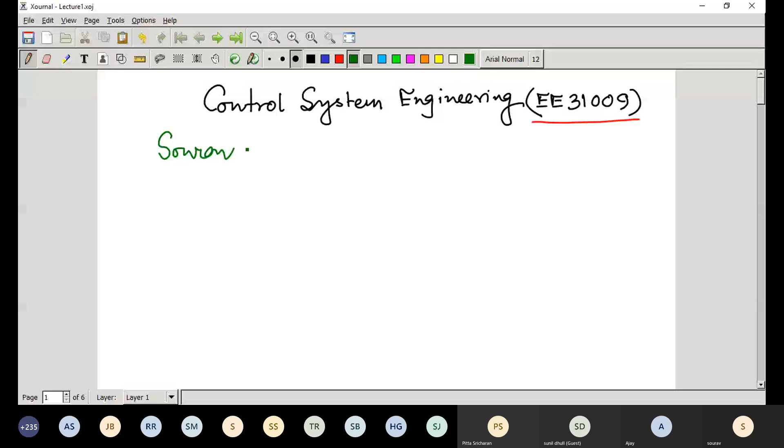So the name of the subject is Control Systems Engineering, and two teachers will be taking this class - myself, Sowrov Patra. Please mute your microphone.

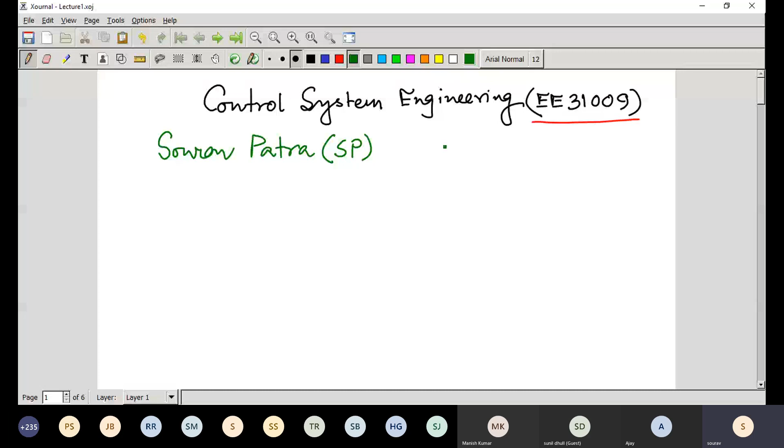And another professor, Professor Arun Ghosh. So both of us will be taking this class, and I will be covering mostly the analysis, and Professor Ghosh will be covering the design part.

A detailed syllabus has already been uploaded. You can see it, and also the breakup is given of which topics will be covered by me and which topics will be covered by Professor Ghosh.

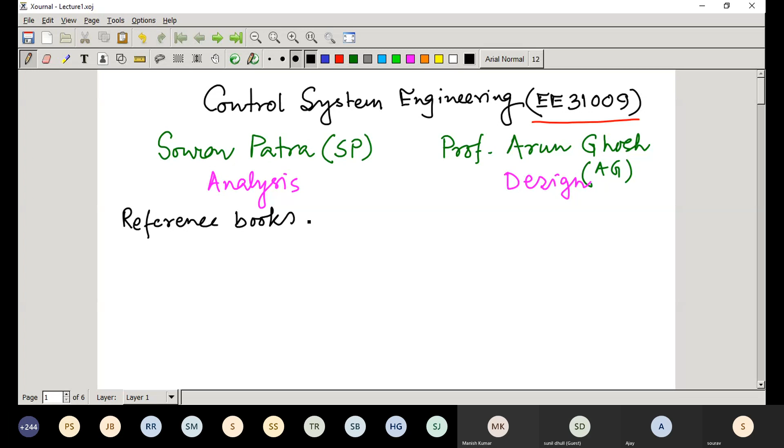There are some reference books that I will be following - four reference books, and I think Professor Ghosh will be giving some other reference books. One is K. Ogata, a very standard reference book, that is Modern Control Engineering.

This is Prentice Hall of India, PHI. Then R.C. Dorf and R.H. Bishop, that is Modern Control Systems, published by Pearson.

Then the third book that we'll be following, that is B.C. Kuo, Automatic Control Systems.

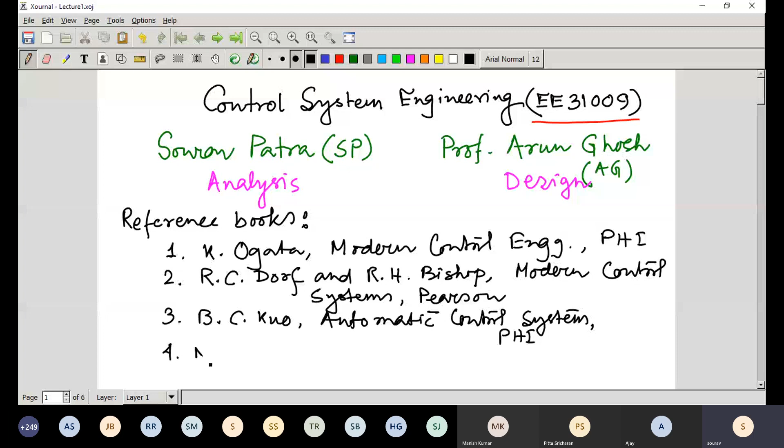This is PHI. The fourth one is Norman Nise, Control Systems Engineering.

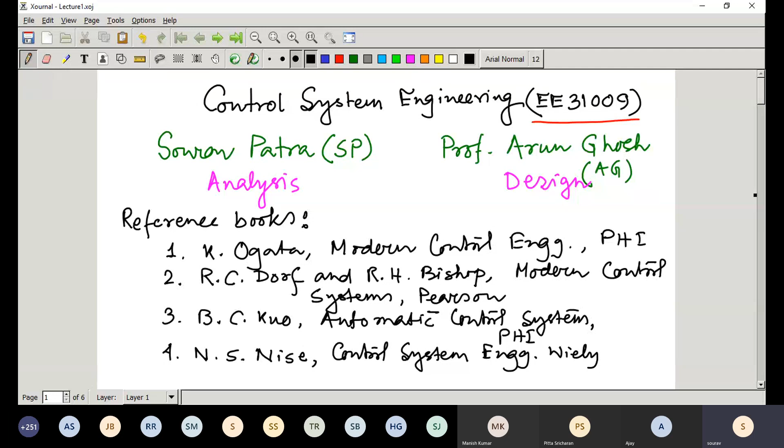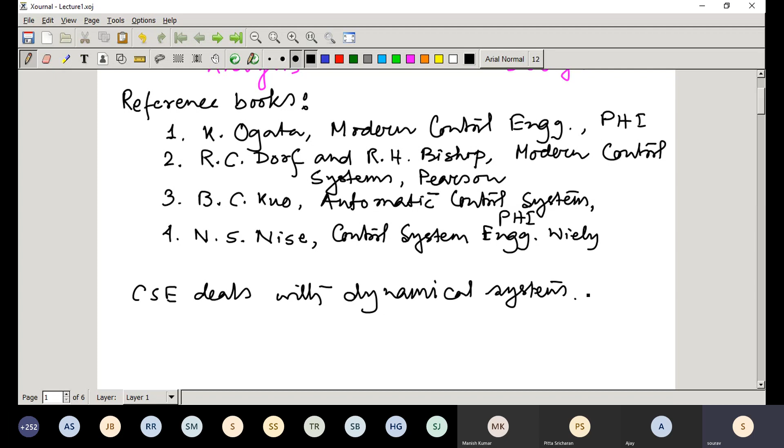So control systems engineering actually deals with dynamical systems. So now let us see what is dynamical systems. As the prerequisite for this course is signals and systems, I am not going into detail of systems here, what is the definition of systems and the different types of systems. I am just going to give you some ideas and definitions of various types of systems that we'll be dealing with in this course.

So first of all, what is a dynamical system? A system is said to be dynamical, or a dynamical system, if its behavior changes over time, often in response to external stimulation, which is that external input, external stimulation or forcing function.

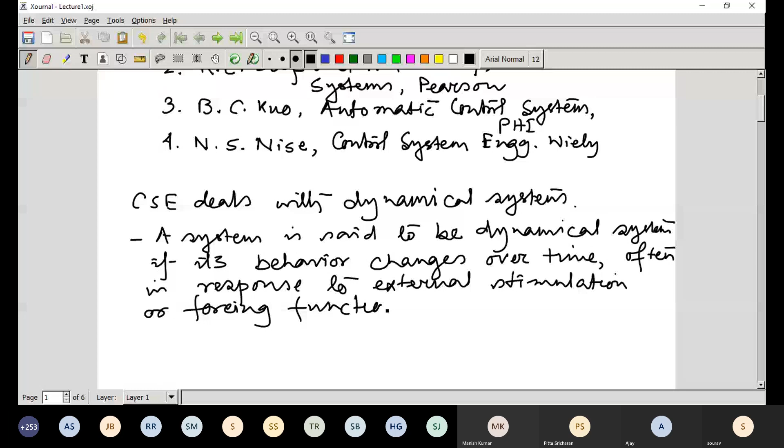In signals and systems, already you have learned different types of stimulation or forcing function, standard forcing functions like step input, ramp input, parabolic input, sinusoidal input. So different types of inputs, if you apply to that system, the dynamical system's behavior changes over time.

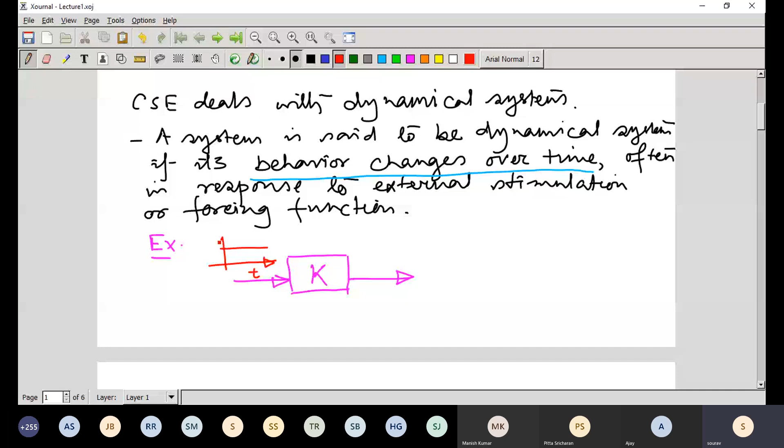So for example, suppose you have a system with just a simple gain K. Now if you apply some input to that system, suppose that input is a step input. This is time T, and the input you have applied is u(t). So then what happens? The output that you will be having is just multiplied, if it is a unit step, so the output y(t) equals K. So from here you can see that this system is not a dynamical system, because whenever time changes, the output remains constant. So this particular system is called a static system.

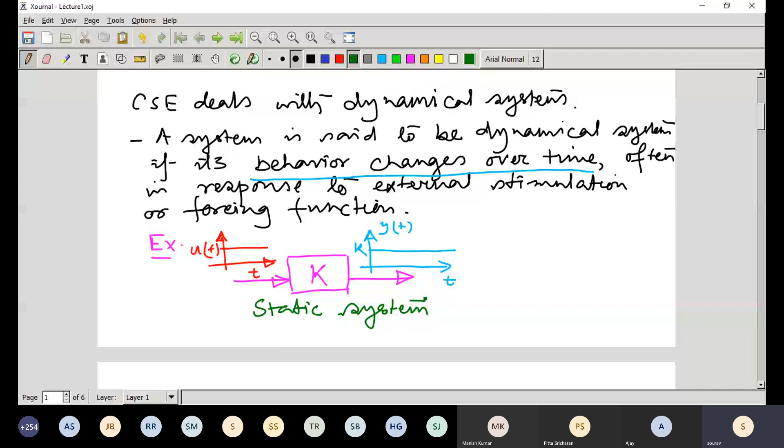So this is called a static system. So then what would be a dynamical system? For a dynamical system, if you apply an input here, suppose you give a unit step, this is T, this is u(t), and you observe what is the output. So suppose if it is a second order type of system, then its response looks like this. That means whenever time grows, you can see that the response is varying. So this is actually the dynamic system.

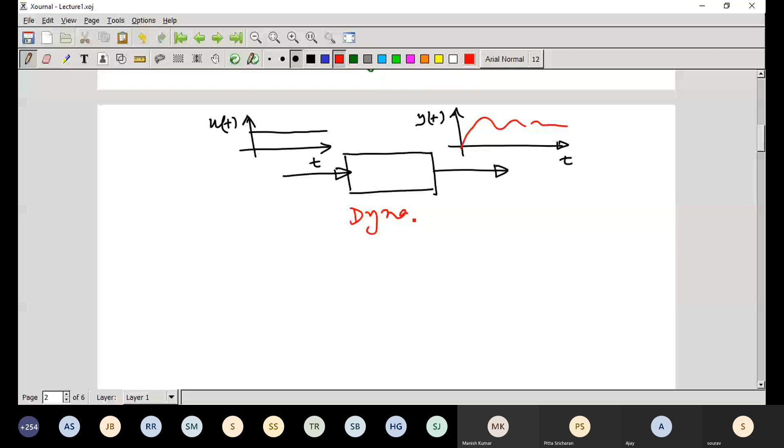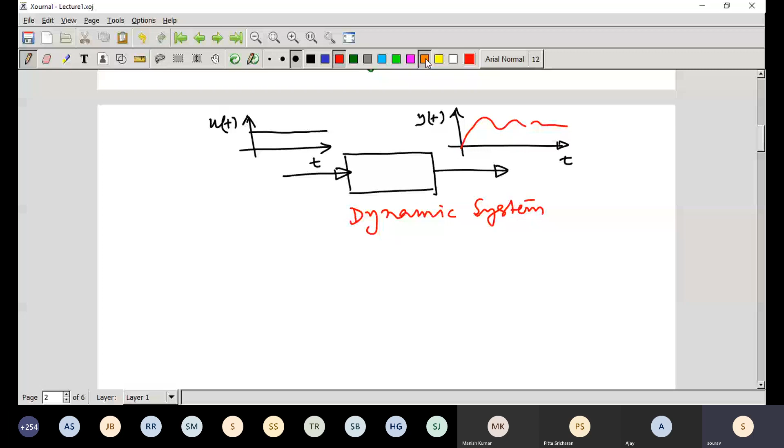So there are two types of systems, static and dynamic, and in this course we will be dealing with dynamic systems. And you can also see that in our surroundings there are two categories of systems, two types of systems that we can see in our surroundings.

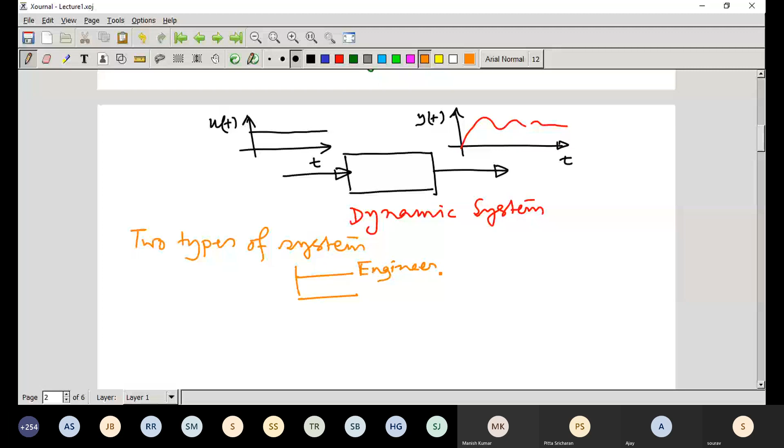What are those? One type of system is called engineered systems. So what are engineered systems? That means that we make. Engineered systems are basically what we design, that we make.

And the other type of system is natural systems. So natural systems means biological systems, climate, etc.

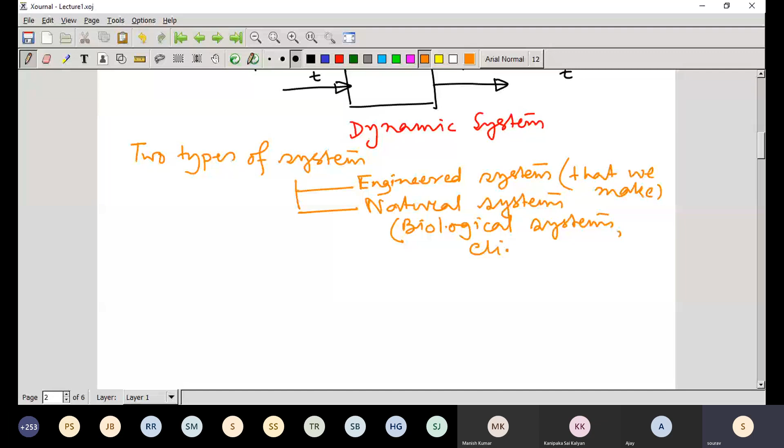So in this course, we will be just dealing with these engineered systems, and in the modeling part, again we'll be considering some engineered systems, and we'll see how to get the input-output behavior, or how to write the mathematical equations to describe the dynamics of these systems. So basically what I want to say is, in this course, we will be concentrating on engineered systems, that means systems that we can make. As for how to make, how to design, that part will be covered by Professor Ghosh.

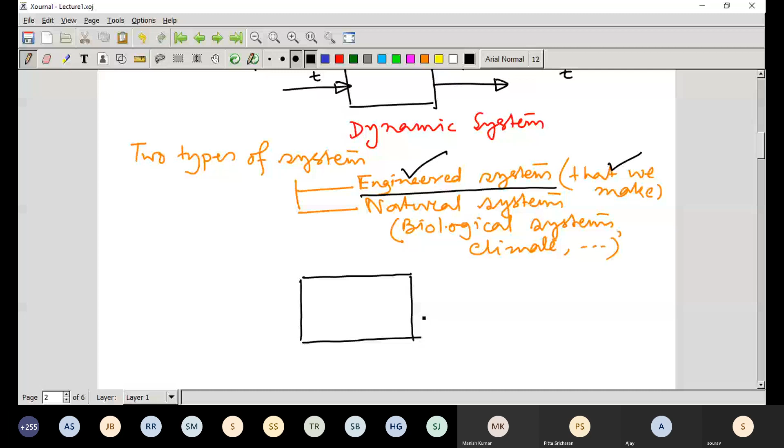So let us see how we can represent a dynamical system. A dynamical system is represented by a block. This is the dynamic system, which in control is also called the plant.

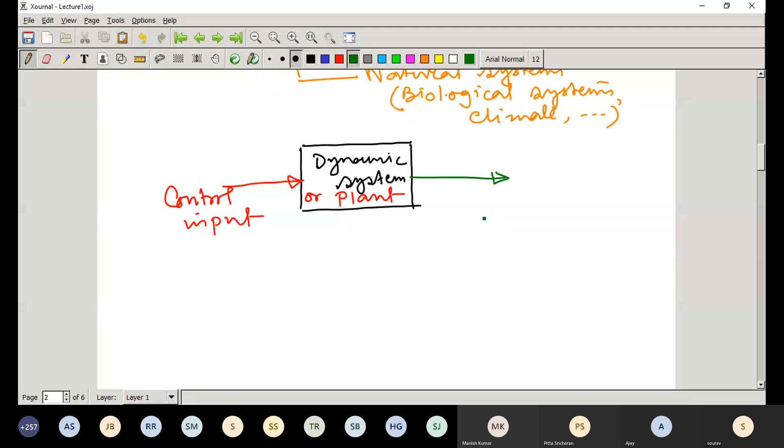Now it has an input, which is called the control input. Now it has an output, which is called the output to be controlled. So in control systems, whenever we'll be dealing with dynamical systems, your objective is to control the outputs. How? By designing a suitable control input.

And in a dynamical system, which are actually inevitable, there are disturbances and noises. That means there are some external signals that enter, or some process noise, process disturbance as well. These signals are called disturbances that enter the system, and basically these disturbances create problems for the system, and your job is to design a suitable control input so that the output will follow the desired shape, or satisfy your requirement, in presence of disturbance and noise. That is the objective. And you need some other signals, called measurements.

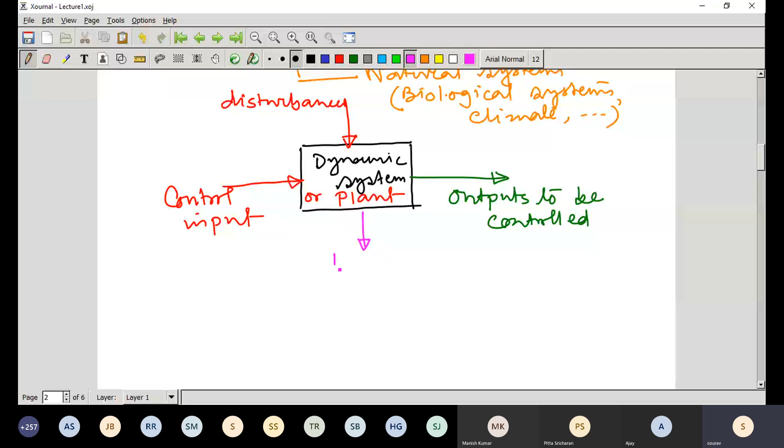Later we will see what we can do using this measurement. In dynamical systems there are four signals: control input, output that needs to be controlled, disturbances entering the system which you do not have control over, and signals measured using sensors. Later we will use these measured signals to close the loop. So for getting closed loop control, we need these signals.

Now let us see what are the different types of systems that we'll see in this particular course, and also we can see in the surroundings the types of dynamical systems. I think you have already learned these things in signals and systems. So we can categorize the dynamical systems from different perspectives.

With respect to the method of analysis and design, we can divide systems into two categories: linear systems and nonlinear systems. I hope you all know how to test whether a system is linear or not. In case of linear systems, it follows the principle of superposition and the homogeneity principle.

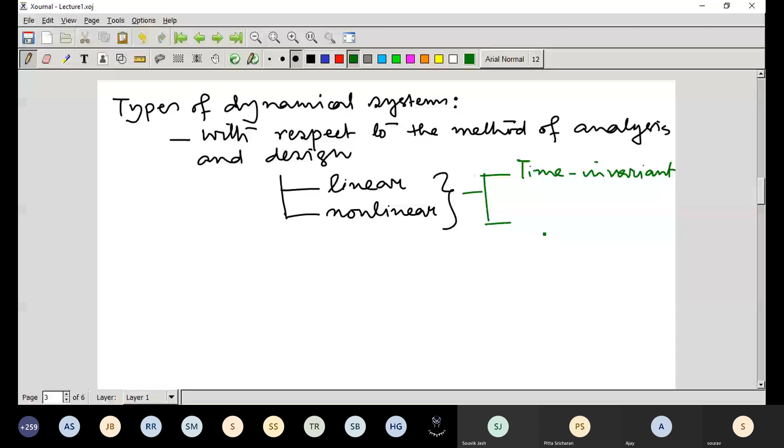And these linear and nonlinear systems can be further categorized into two different classes: time invariant and time varying. So these are the two categories, linear and nonlinear systems, categorized with respect to the method of analysis and design.

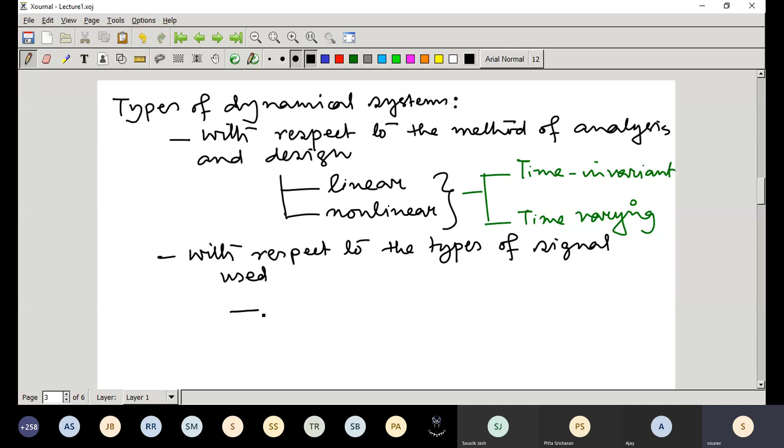Then the other category is with respect to the types of signal used: one is continuous time systems, and another is discrete time systems. So these are the different types of systems in our surroundings, categorized with respect to different aspects: linear and nonlinear with respect to method of analysis and design, and continuous time and discrete time with respect to signal type.

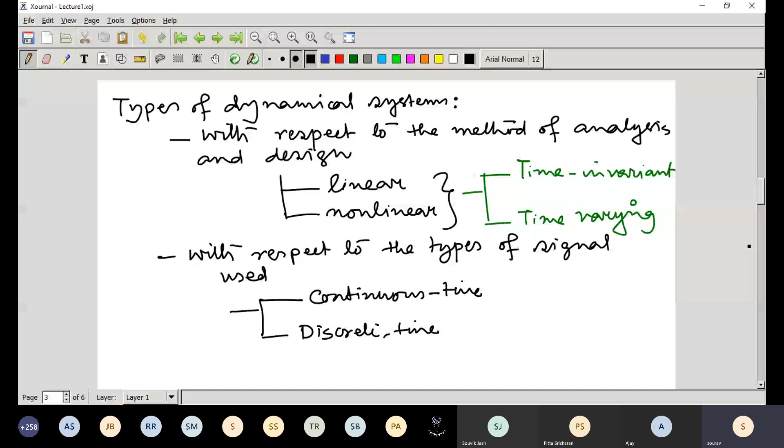I think you all know these things, you have learned it in signals and systems. So let us see a few examples.

Say x dot, this is a dynamical system with some memory: x dot equals a x(t). Now x dot equals a x(t) squared. Now x dot(t) equals sine(t) times x(t). Now x dot(t) equals sine(t) times x squared(t). Here I have taken simple examples for better understanding; you can take other examples, and I think you have already done these things in signals and systems, just for recapitulation as preliminaries.

So the first system is the linear time invariant system. Those who forget these definitions, I suggest you see your Signals book. Here you can see, because of the square term, this is a nonlinear time invariant system.

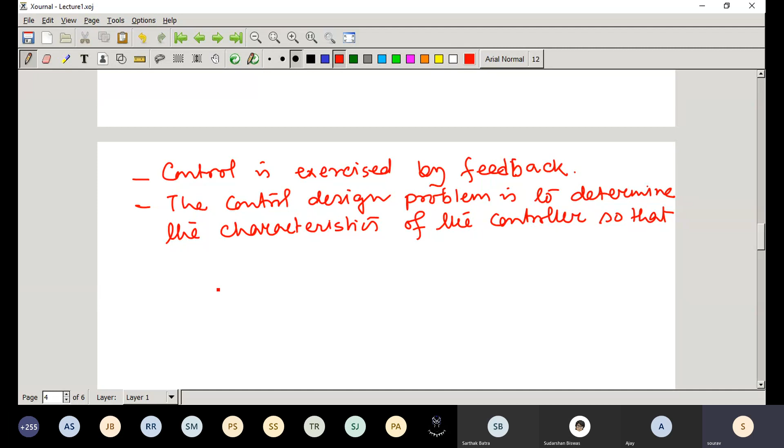So these are actually some objectives. Let me point out those things. That is the control design problem: to determine the characteristics of the controller so that the controlled outputs, we have already seen that controlled outputs...

can be... so there are various objectives. One objective is it can be set to prescribed values called references.

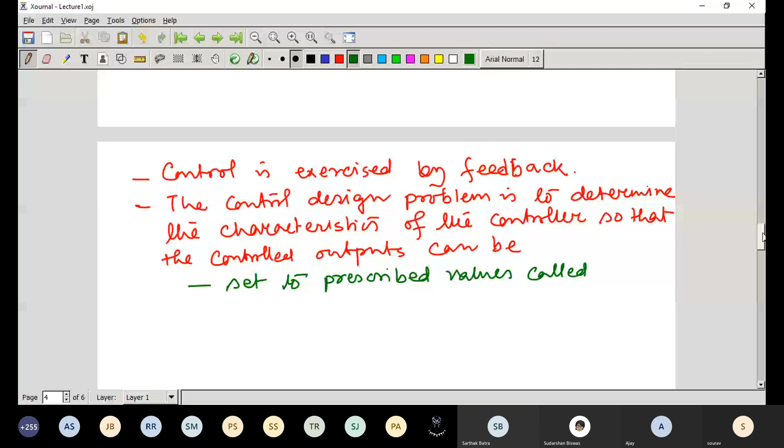The second objective is maintain at the reference values, because these reference values are set by you, the designer or the user, and your job is to design a controller so that the output will be maintained at the reference value despite the unknown disturbances.

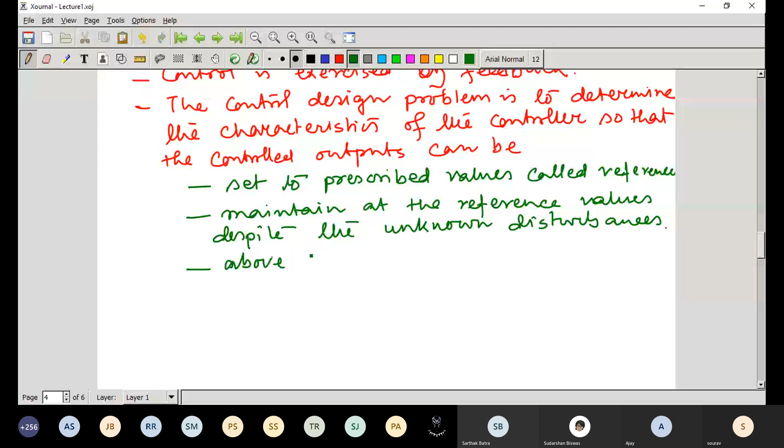And the third one is above two. That means these two above are met despite the inherent uncertainties and changes in the plant dynamics.

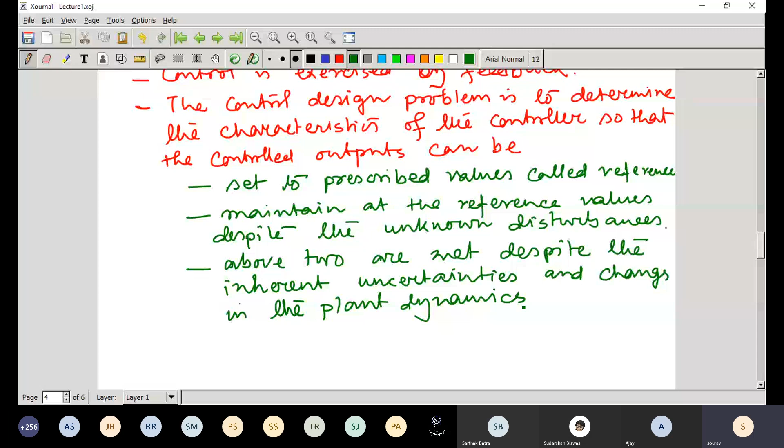So try to understand these three objectives. This is actually the main objective of control systems. So control is exercised by feedback. That thing we'll be discussing in detail later. Now, the control design problem is to determine. So these three are actually the different objectives.

One is you set the reference value. Suppose I want that output will be at the value 5. So as a user, you will be setting that value 5, and the control system is to be designed such that the output will track that reference value at 5. Now the point is, in physical systems, there are a lot of changes, a lot of unexpected things may happen. One thing is the disturbance and noise may enter, which are actually inevitable. So you need to design a controller so that even if there are some disturbances, the output should be at the value 5.

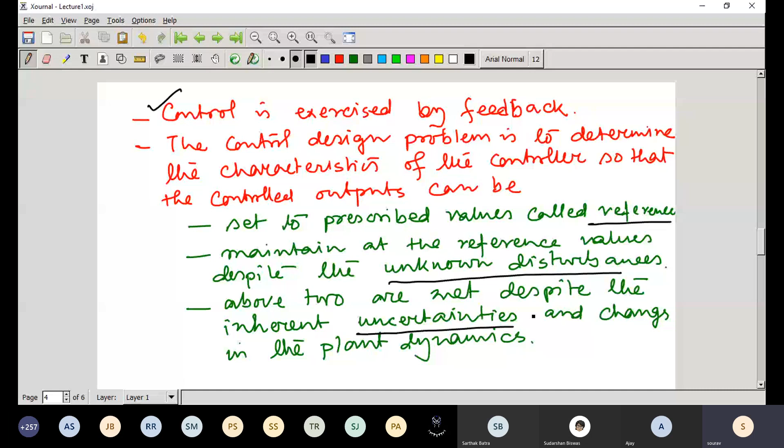5 means you have set that value at 5. Whatever value you will be setting, that is called the reference value. And another important aspect is the uncertainties. Uncertainties means whenever you have designed a controller, you have considered all the nominal situations. You have assumed that all the parameters are known and there are no changes, no environmental changes, nothing is going to happen. But practically it is not like this. Practically everything is changing continuously, and the value that you have considered to design a controller may not be the exact one. Even if you get an exact value, once that system runs, that value may change because of environmental conditions, aging, etc. So a lot of uncertainties will be introduced in that system.

So as a control systems engineer, you need to design a controller so that the output should be maintained at the reference value even if there is some disturbance or uncertainty. So basically this concept is called robustness. This is called the robustness property. That means if the designed system can ensure the output response in presence of disturbance and uncertainty, then robustness is ensured. So in this particular course, at the end, we'll be taking some lectures on robustness. This is very interesting as well as important from a physical point of view, as you know, uncertainties and disturbances are everywhere.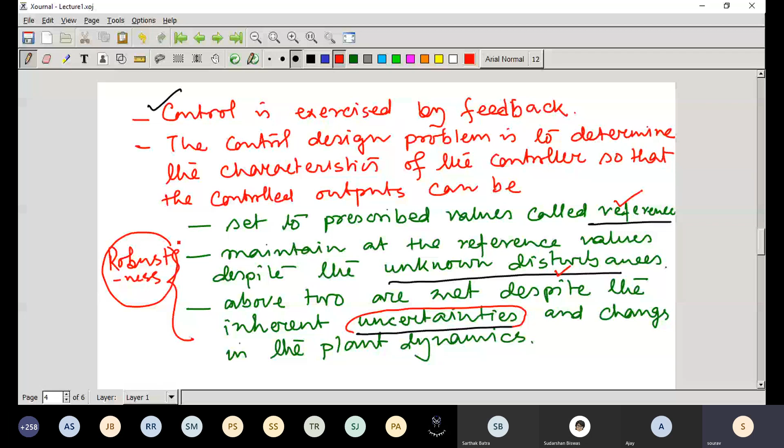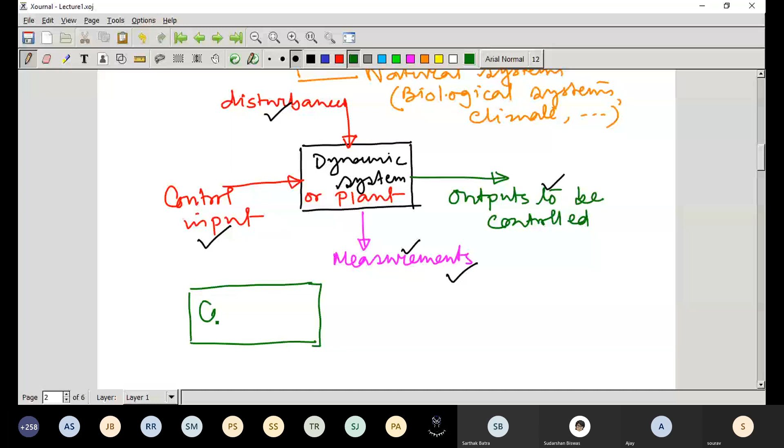So now let us see how the feedback can be implemented. So here we have shown the dynamical systems which has 4 different signals. One signal is the control input, then the disturbance, then the outputs to be controlled, and measurement. So as a control systems engineer, you will be designing a controller taking the information of the systems. Please mute your mic because I am getting feedback.

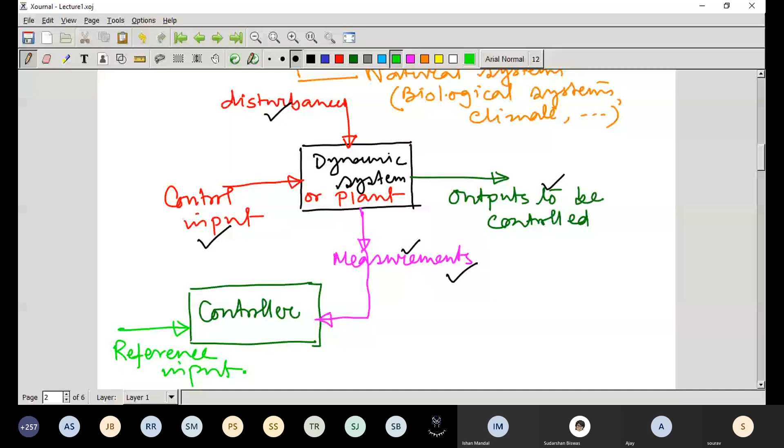So this is actually the concept of feedback. Here, this is the dynamical systems, and we are taking some information of the dynamical systems, and then we set a reference command here. So this is that reference command, and then we feed this signal to the dynamical systems. So basically what we do in control systems engineering, the dynamical system or plant we have. So now our objective is to control the output. So how will it be controlled? Because we have set some reference input here.

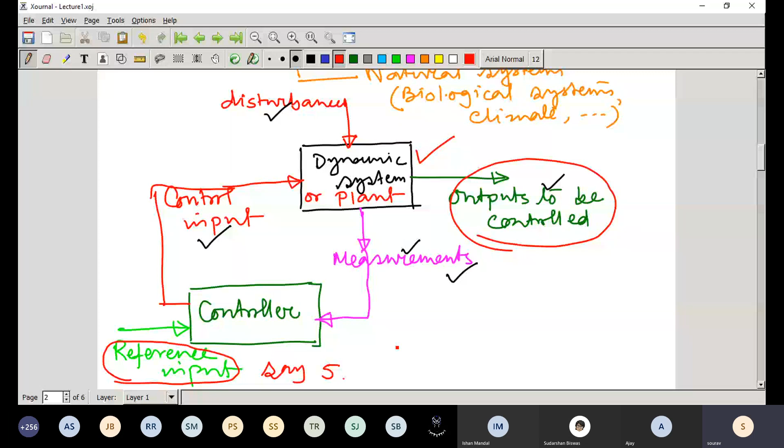So for example, say 5, and we expect that the output should be at 5. So now how to do that? We take some information of the dynamical systems, which we will be learning in this course, and then design a controller.

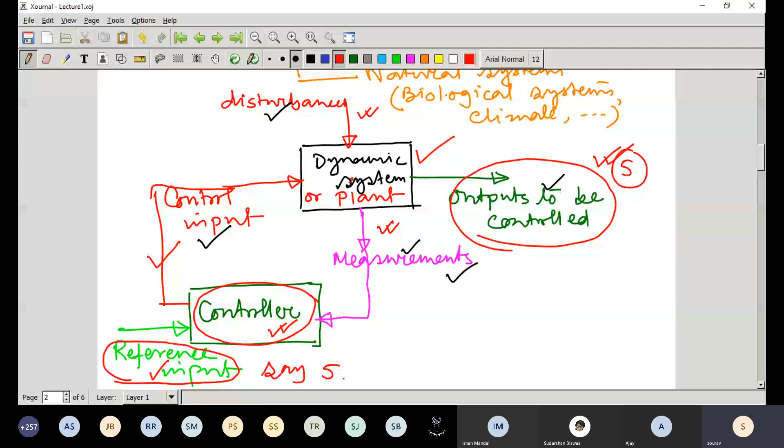This controller is nothing but a law, an algorithm that generates a signal which is fed to the dynamical system such that the output signal will be same as the reference input. This is actually the objective of this course, and here you will be learning many terminologies. The second thing is how to design this controller and what information we will be taking, and if there is some disturbance, what are the effects on that output. Overall, you need to ensure that whenever you close this loop,

this whole thing should be stable. In this course, we will be discussing the definition of stability, because there are various notions of stability, and we will be learning how to design a controller. We will be learning how to take the measurements, feedback. This is actually that feedback part. And whenever there is some disturbance or noise, how to maintain the output at reference value, that thing we will be learning. So this is basically the general block diagram of closed loop control systems.

We'll be discussing this in detail later. There are important components involved in a closed loop. One is the dynamical system. Second is the controller. Then there would be some feedback path. And whenever you are getting that measurement, you are using some sensors, and that control input is fed to the dynamic system through some component called actuators. So those things we will be discussing later.

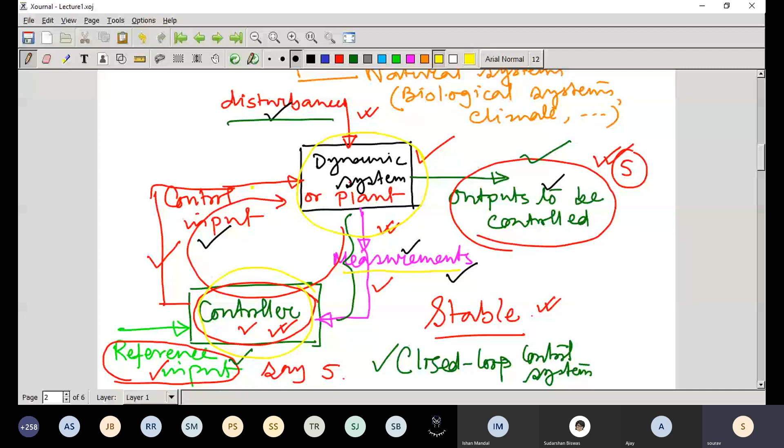Now let us see. This is actually a very important aspect of this course: why should we learn this course? As it is in your curriculum, you may say somehow we have to take this course, so that's why we are taking it. But my answer is no. The reason is, first of all, as I have pointed out, it is one interdisciplinary course.

You can apply the system theory concept as well as control systems concept anywhere - in computing, in aerospace, in economics, everywhere, biological systems, everywhere you can apply these concepts, system theory concept, as well as if you would like to design a closed loop control system. So it has actually wide applicability. So let us see what is the actual scenario at present situation.

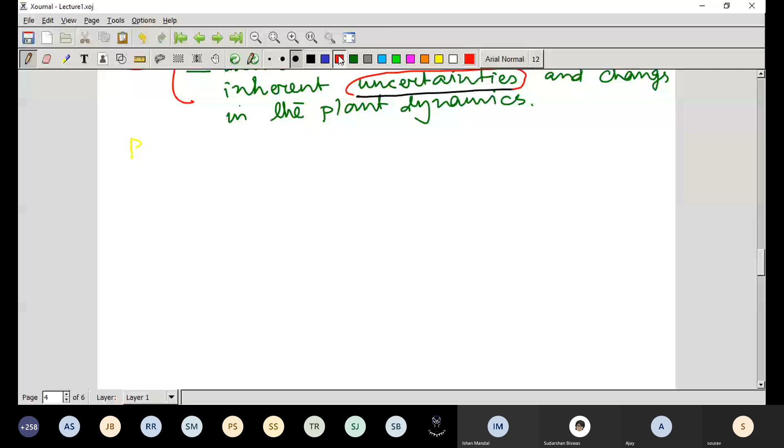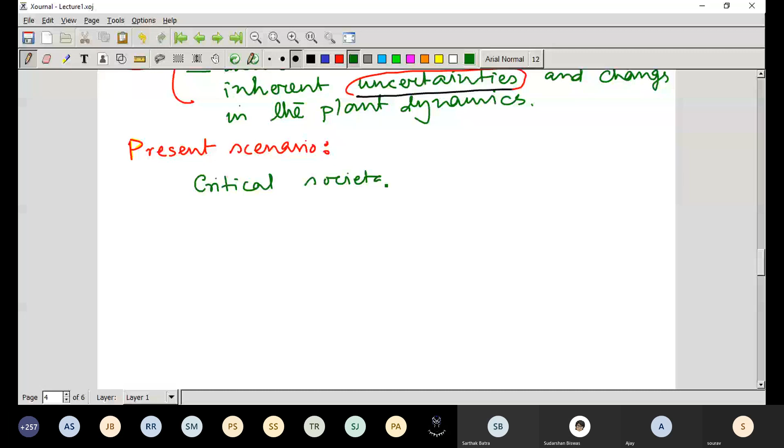So the present scenario - as you all are third year students, I think you all have a lot of information regarding technology developments and what is going on around us. I think you have noticed at present situation, there are some critical societal challenges. So critical societal challenges. What are the critical societal challenges at present we have?

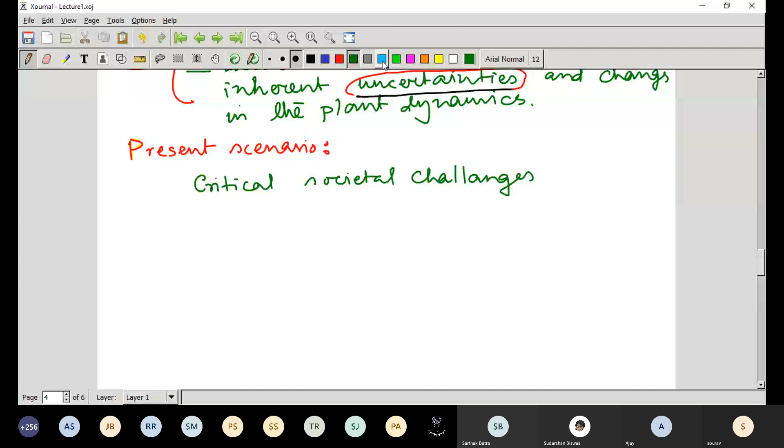So one is transportation. Second one is energy. Third one is water, healthcare, and the last one is manufacturing. So these are actually the 5 verticals we are currently concentrating on, and based on those challenges,

we have identified there are some key research problems. So those research problems are here. Basically, in order to solve the issues involved in those verticals - transportation, energy, water, healthcare, and manufacturing - the control systems engineer needs to develop different efficient control algorithms as well as control systems, namely distributed networked control systems.

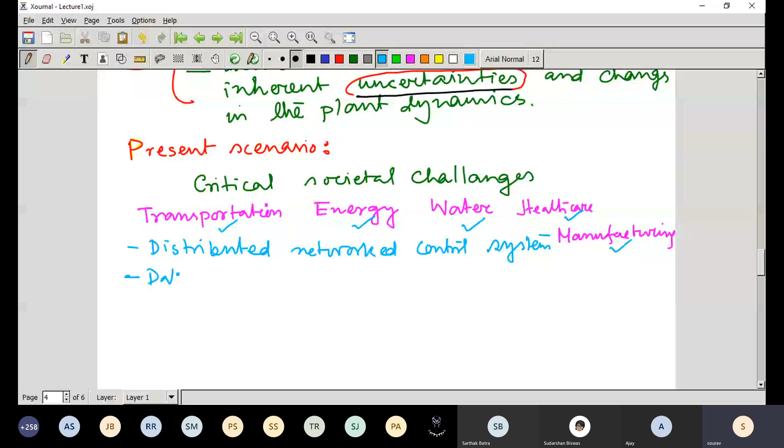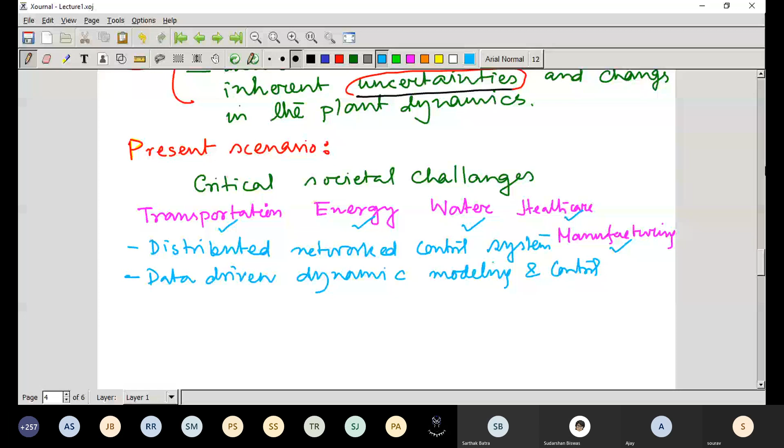The second one is data-driven dynamic modeling and control. This is another objective, and people from different research groups around the world are working on those topics. The third one is complexity and control. Day by day, the system is becoming complex, so we need to develop some theory to deal with complexity and control. The fourth one is critical infrastructure systems.

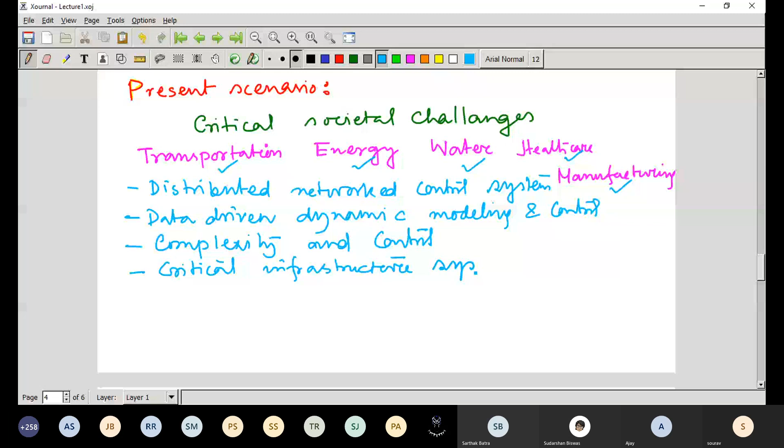Then a very important and catchy area, that is cyber physical systems. Many of you are familiar with this term, because nowadays you cannot control systems just by using a centralized algorithm. As systems are placed in distributed fashion, you need to make a coordination between the physical systems and the cyber world, and correlate computing, control and communication all together. So cyber physical systems deals with this particular thing, and then autonomy, cognition and control.

So why am I telling you these things? You may think, what is the motivation for learning this particular subject? This subject is designed to give you the fundamental concepts of control systems. At present, as I have shown here, there are 5 verticals where people are giving a lot of emphasis, and a lot of innovative research works are going on. And if you consider control systems, these are the 6 areas people have identified.

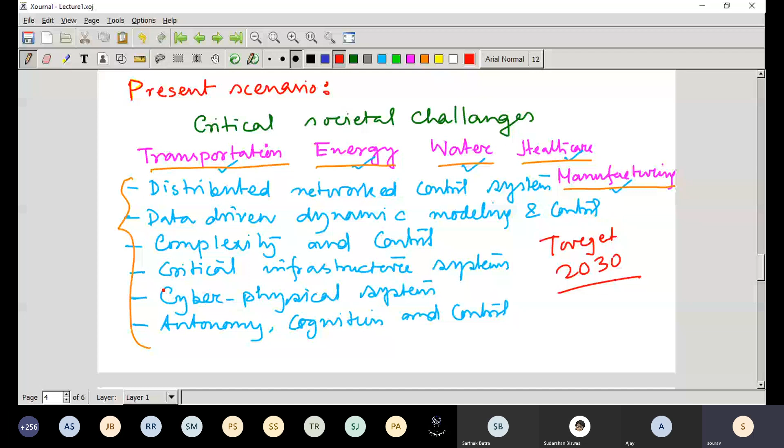Now let us see what is feedback. As I have pointed out, control is actually exercised by feedback. This is a very important concept of control systems. Feedback refers to a situation in which two or more dynamical systems are connected together such that each system influences the other, and their dynamics are thus strongly coupled.

So let us see what that is. The term feedback refers to a situation in which two or more dynamical systems are connected together, such that each system influences the other, and their dynamics are thus strongly coupled.

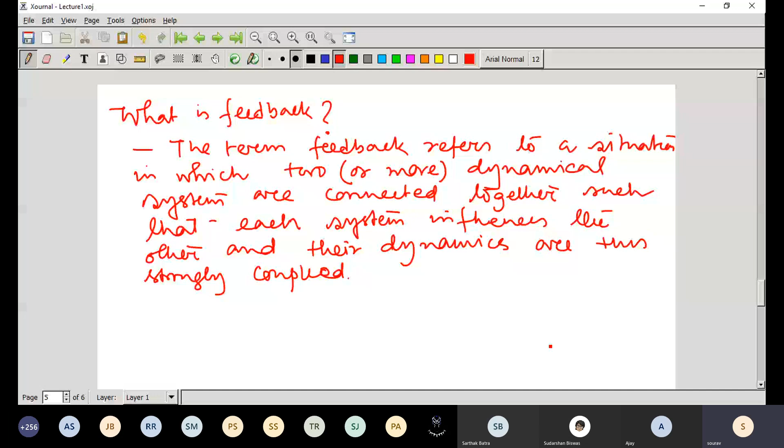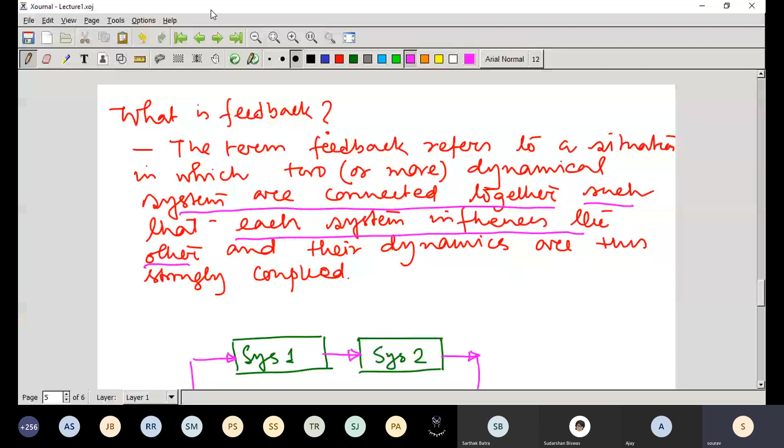These things would be clear if we draw two simple systems. Say system 1 here and system 2 here. The output of system 1 is affecting system 2, and the output of system 2, if it affects system 1, then we can see that the systems are connected together such that each system influences the other. So system 1 is influencing system 2 as well as system 2 is influencing system 1. This particular thing is called closed loop, this is the feedback system.

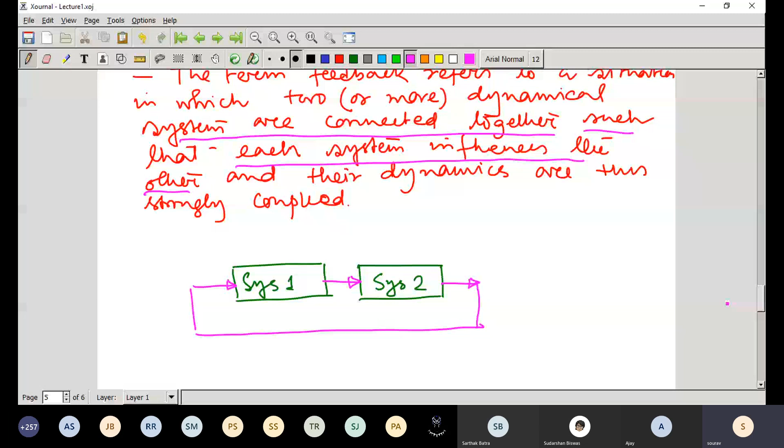And if they are not coupled like this, how does it look? If you have system 1 here and system 2 here, system 1 is affecting system 2, but system 2 cannot influence system 1. This particular structure is called open loop, this is a non-feedback system.

So what have we seen, what is feedback? Feedback is a term that refers to a situation in which two dynamical systems are connected together such that each system influences the other. And here we have seen two different structures, the closed loop structure and the open loop structure.

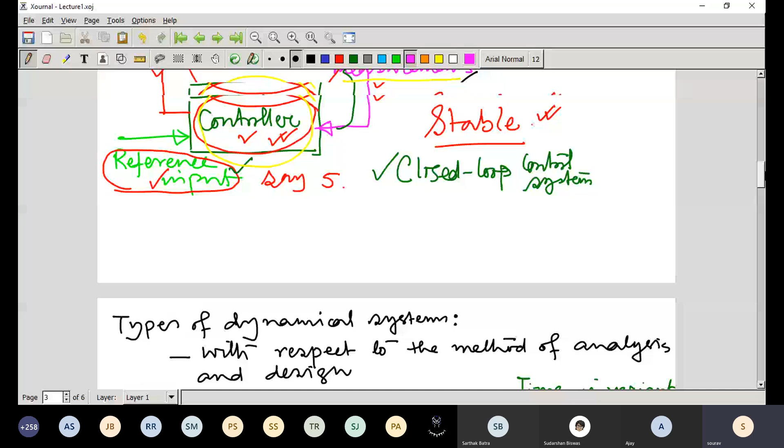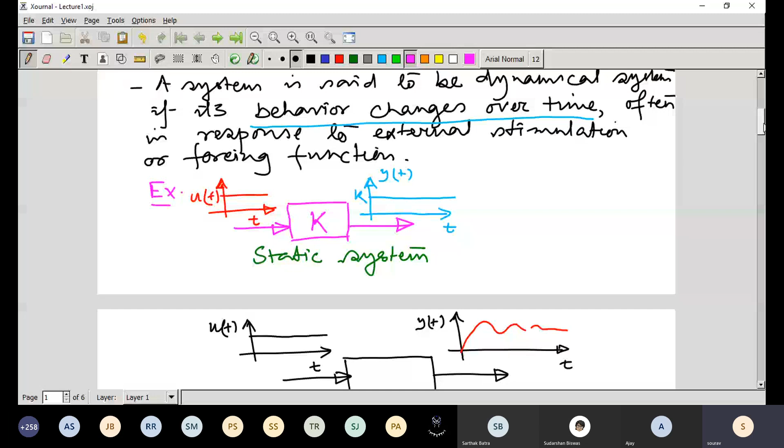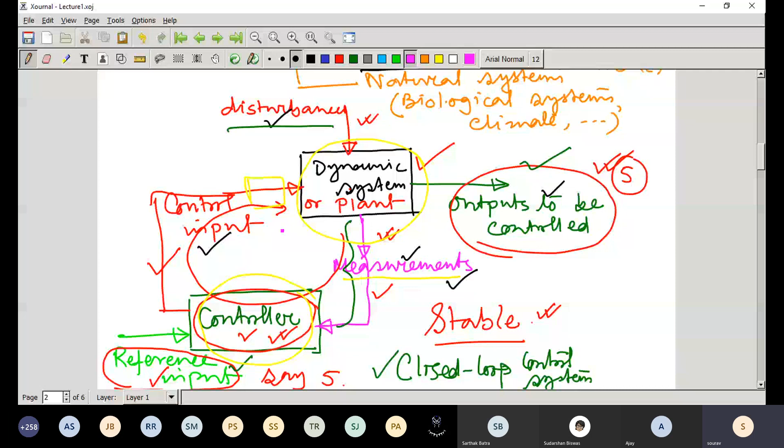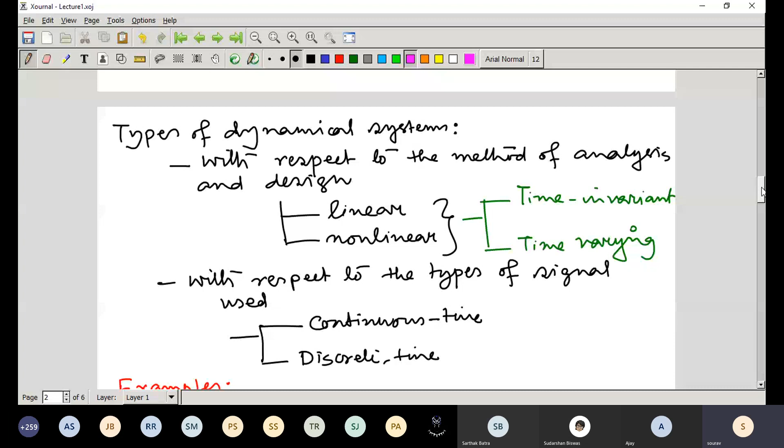Today what we have discussed: we started with dynamical systems, and we have seen the difference between dynamical systems and static systems. Then we have seen the different categories of systems—in our surroundings we have engineered systems and natural systems. We discussed in brief how a closed loop is formed. Then we saw different types of systems: linear, non-linear, continuous time, discrete time systems, as well as time varying and time invariant systems, with a few examples from different classes of systems.

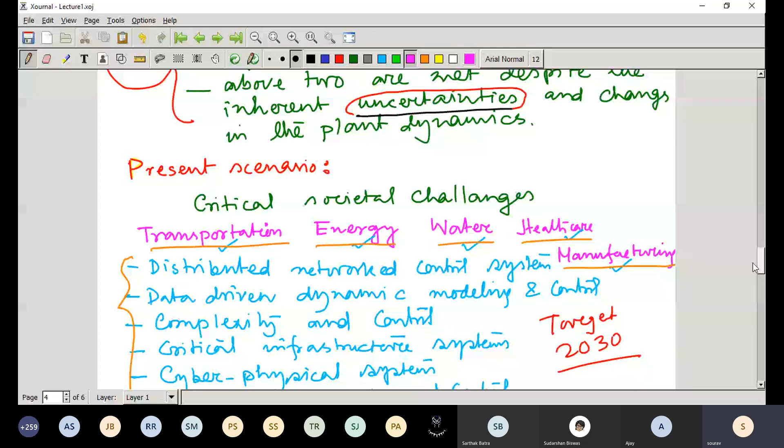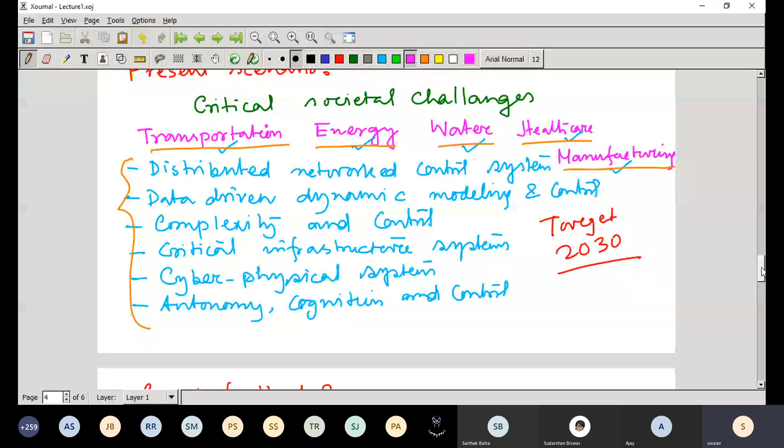And then the motivations for learning this course: the present scenario and 5 different verticals where we need to give emphasis. The experts have identified some topics where we need to work, targeting 2030, so we can explore our ideas, concepts and knowledge of control systems along those directions. If somebody wants to do research works or project works, you can also do so—this is one of the motivations. And then we have seen what is feedback and the two different types of structures, closed loop and open loop structure. So we can stop here today. Do you have any questions?